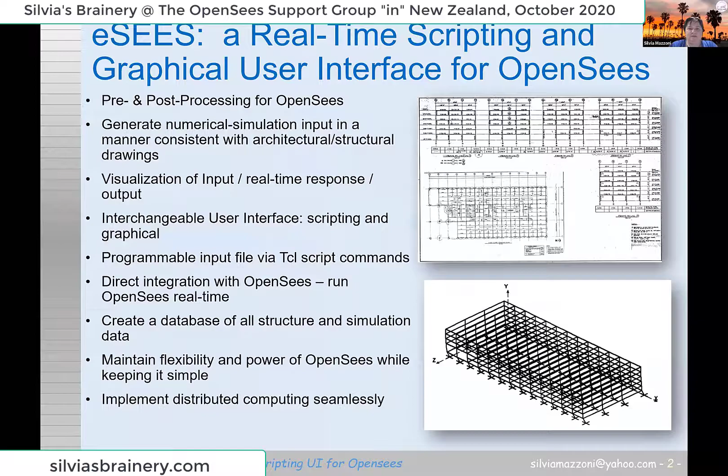Here's just an example that I even brought units in. I brought units into OpenSees scripts a long time ago with that little script that defines units, because units are just variables anyways. I learned that from using MathCAD. And this is really just to show you what I like about the Tk interface, just the little windows and widgets that are available in Tk. So that was really important.

As much as you can go to Jupyter notebooks and things like that these days, I wrote a Jupyter notebook for the ground motion selection for SCEC, and it just doesn't have the sophistication that these widgets have. So I like this part, that it's associated with Tcl/Tk. And yes, you have to write the scripts yourself.

But here's the perfect example of my goal with writing this user interface. So eSEES is not a GUI, it's a UI. GUIs are so 90s, right? UIs are really the way to go now, where you can write a script or you can deal with the graphical user interface, and they interchange the two.

And I'm going to show you a slide later, but whatever you input in the graphic component, it then saves it into what I see here. This is eSEES language. It's a whole other kind of higher level language above that language of saying, okay, add some material data where you've got a name, you've got a type, and then all I care for is 4,000 PSI, and it's confined concrete. I don't know what all the other parameters that OpenSEES has.

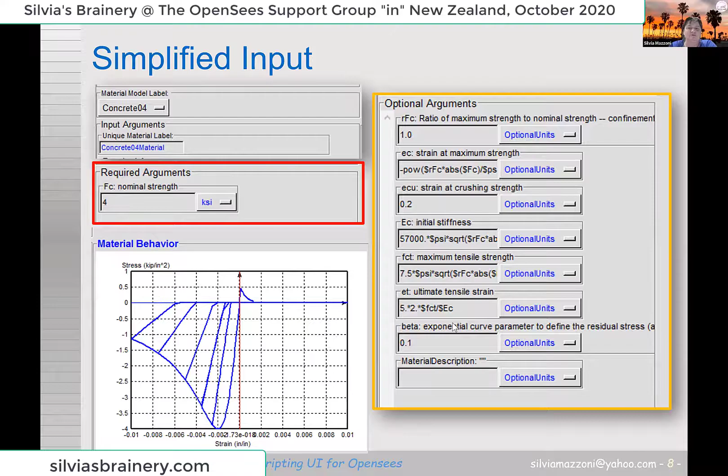But what's really nice is the user interface for looking at materials. And it can actually help you to build an element or a material and really test out what is the effect of the different parameters. It's broken down, as I was saying before, into required arguments and then optional arguments. So you see, I've put in 57 root f'c for the Ec, which then for Concrete04, you actually have to compute something else. And so this kind of does all those input parameters for you. It's just a list of features.

What's nice is the model input is defined as you define elevations, and then you define a grid, and then you take those elevations and you place them on the grid. And so this is how you define a 3D frame. There are no node numbers; these are the local coordinates. Of course, right now it's based on Cartesian coordinates, so you have to have some sort of regularity. But you define a geometry, the floor heights, bay widths, and it could be different for different bays. And then in the background, I compute the node numbers, and then I generate an OpenSEES input file.

And so I go through this process for materials. And I think I have most of the popular materials. I've laid things out where I can just add another material if I want. I've got some templates for fiber sections. So it's really cool because you can, in real time, give the size of the rebar and the number, and you can test your moment curvature. Here's an example where you've got minimal input where you just pull down what are the materials that you have. And then there's additional default parameters as well to just make it that much more interesting.

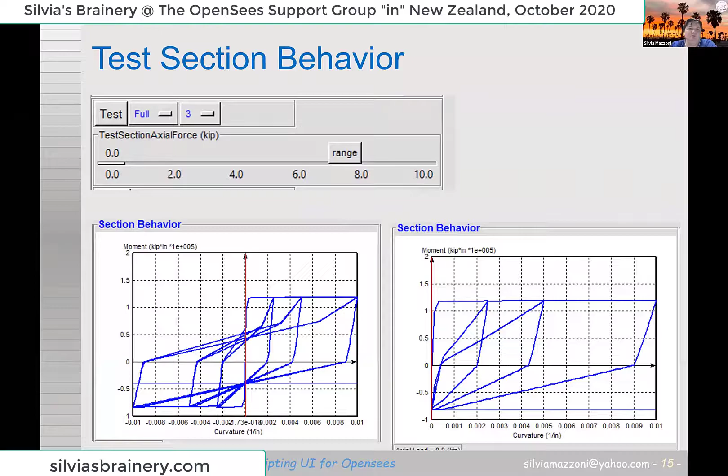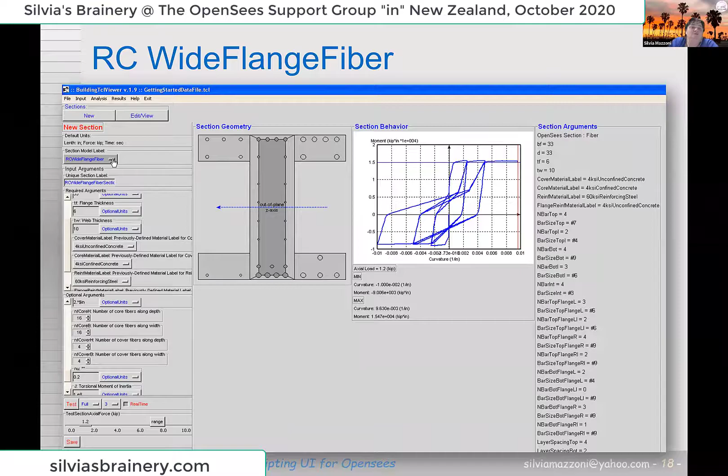So you can really look at different behaviors and different cross sections, and you can really have a lot of fun with it. So it's nice because you can do some moment curvature analysis. You could use this program just for that if you want to.

And then just as you have it in graphics, here's how that input would be. So I've shown you a material. This is how it would be for a cross section in a reinforced concrete section. Or even do the same thing for element types. And so I'm going to just kind of fly through here. Oh good, I did fly through those parts.

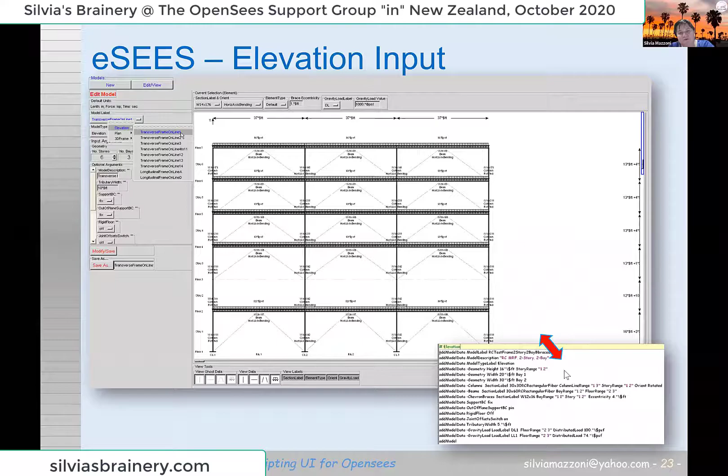Then there's building the 3D model. So here's how you use the interface to define your elevations. And as you can see, there's nice quick menus. There's a lot more menus now than when I had them then. Or you can write that in a script. If you do it graphically, it's going to write it to a script. If you do the script, it's going to load it up graphically.

There's lots of different types of elements you can interactively change, and this is just to kind of walk you through all the little menu options that you have. A lot of these things have changed as well. And what's really cool is gravity loads. You can define gravity loads, and then I convert those into loads and masses directly. You don't have to do it.

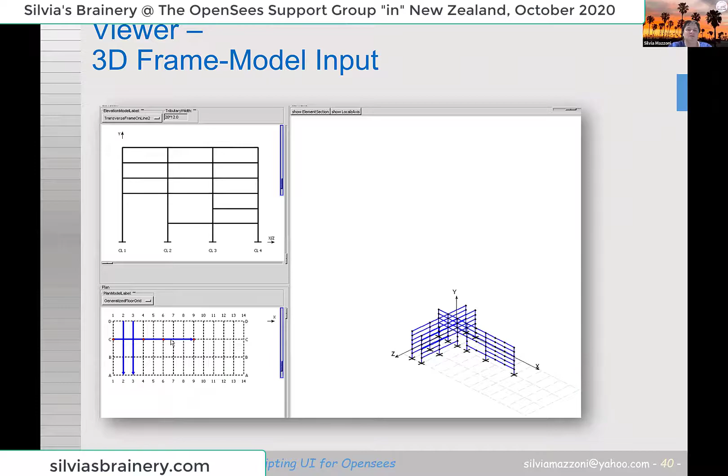Or you can do nodal masses and nodal forces that are just uncoupled if you want to. So it does that whole computing of the mass for you. It also computes the equivalent mass at the nodes. So it's just an interface where you pick an elevation and you click it on the grid and it appears on the right-hand side.

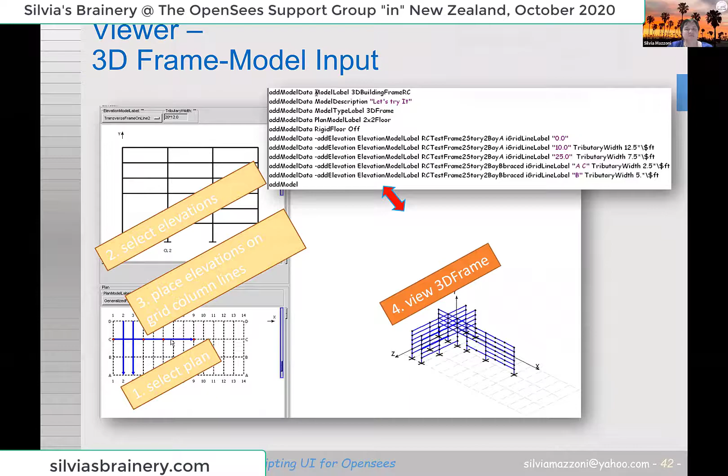So there's a lot of programming that went on behind it to really minimize how much work you as a user need to do. The less human interaction there is, the more repeatable and less likely we are to make mistakes, but it also just speeds up. Oh, what if I have variations on this? It's kind of fun to be able to visualize; this frame here is actually defined using these scripts.

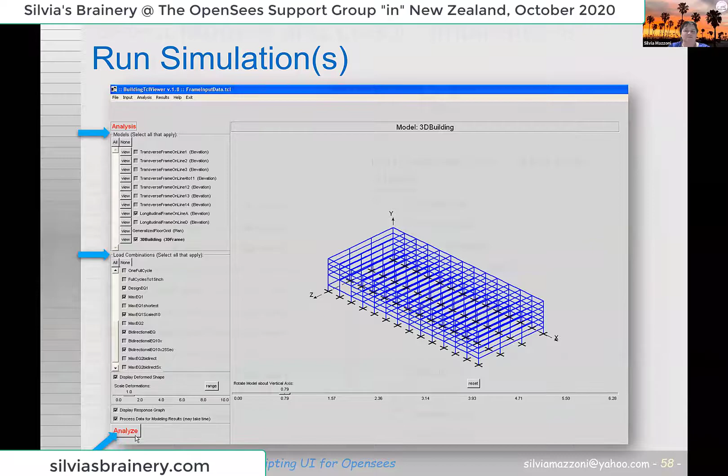And then there's a lot more features. And even in the post-processing, it's kind of cool to visualize. Then it's got loads and load combinations that are defined. And then you can actually run OpenSees in real time. You've seen these scripts, they're in the examples manual. I implemented them to be able to visualize the analyses in real time.

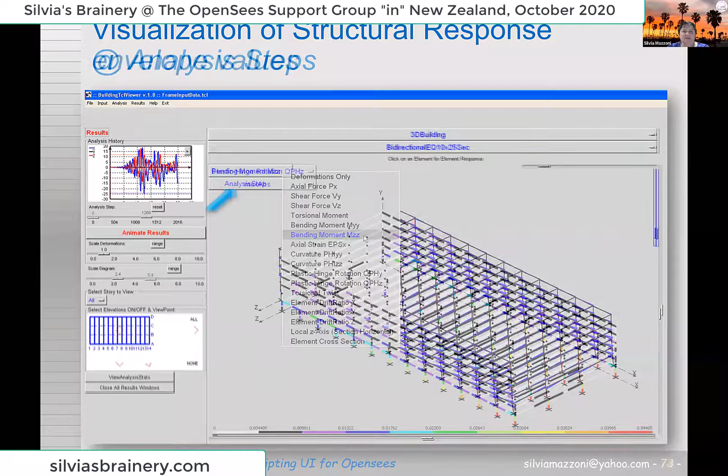And then you can visualize the results, typical things like the color of the element, and look at the node responses. And actually, it's kind of cool. You can visualize bending moment diagrams, cross sections, and then only select certain things. You can look at the history, but then you can actually get all the way to the fibers, what the fiber stress strain history is.

And this one's a little tricky because this is actually not done. The problem is you don't want to have all these recorders during the analysis. But I've spent the time on it. It's like, wait a minute, if I have certain output, I can recreate this. And so you can go down to your stresses and strains without having to store those during the analysis. So that makes the analysis a lot faster and you don't have to store so much data.

And so that's pretty much it, I think it's wonderful. I think everybody should be using it, but I wanted to show you a different way of approaching a user interface where it's not just graphics and looking at your model, but really redefining it; it's almost more of a BIM type of system. So that's the little dog and pony show.

Any questions on that before I switch back to more of a conversation where I have bullet items with you guys? Yeah. How are you solving the convergence issues when you're making complex models?

Because they do have, when you're using certain materials, certain combinations. For example, in a commercial software, most of the time you don't have any issue and it will give you a result. And how is it with this one? So it's twofold. Yeah, the commercial programs hide it and they put in a lot of numerical damping so that you don't have convergence issues.